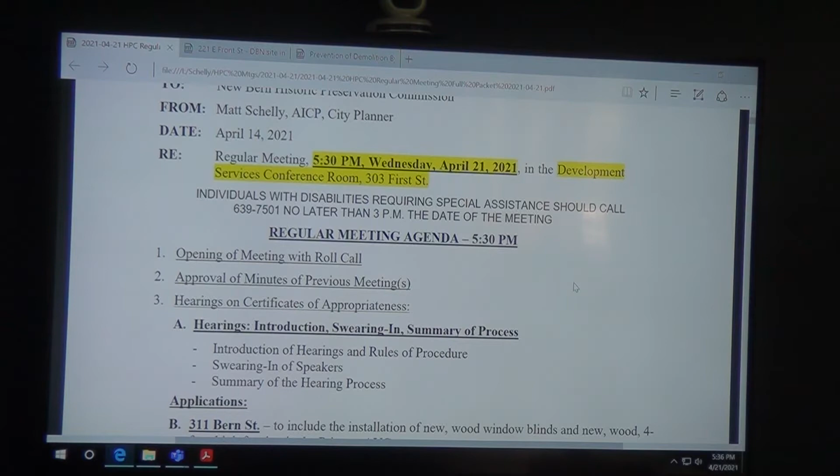Here's how we're going to proceed. The HPC administrator provides an overview of the application. The applicant or their representative presents the application if they have additional comments. Proponents and opponents who have received notice of the hearing can present evidence. Rebuttal is allowed by the applicant and by proponents and opponents who receive notice. Others who can justify that they have relevant information and will be directly affected can present evidence.

The HPC administrator presents the staff's findings and their recommendations. The applicant or their representative has an opportunity to make final comments on the application if they so desire. Commissioners discuss the evidence and may ask for clarification from the applicant or their representative. The chairman calls for a motion to approve or deny the application with stated findings of fact. The motion is discussed by commissioners. The chairman calls for a vote on the motion by the commission. The COA can be approved, it can be approved with conditions, or it can be denied.

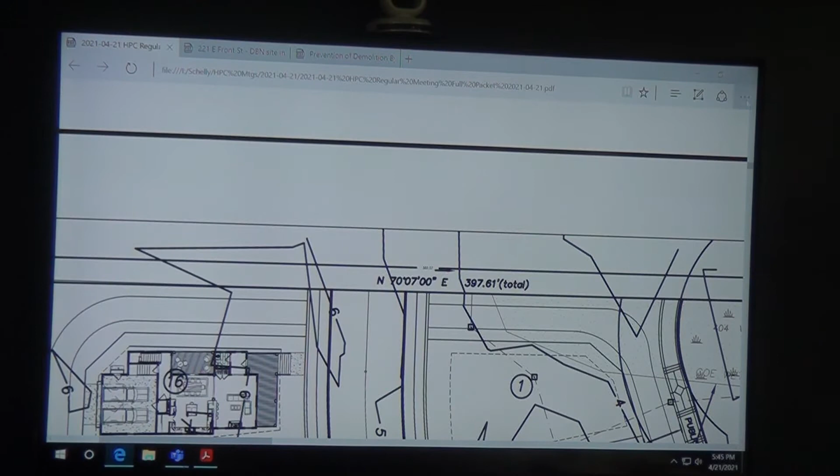I apologize, I used the same front on it and did not change it. All right, so you need to correct this page. Yes, I do. So we need to remember that whoever makes the motion, don't forget about correcting the first page. Bruce, let me be clear, we're saying the property has two owners?

No. So, that's one of them. The owner is Scott Davidson, and he has signed the authorization form. I used the original River Station front page that I've been using for all the houses that I've been bringing to you, which is Hubie Tolson and the River Station Development Corporation. So they are working in tandem, and they have a contractual relationship to build a house for him.

This is the front sheet of the drawings. You see the site plan on the left. We're talking about this one at the bottom, 802, on the corner of Queen Street and East Front Street. This lot also faces onto, or backs onto, the river, which is off screen on the right. So the front of the house faces East Front Street. This is a rendering of that.

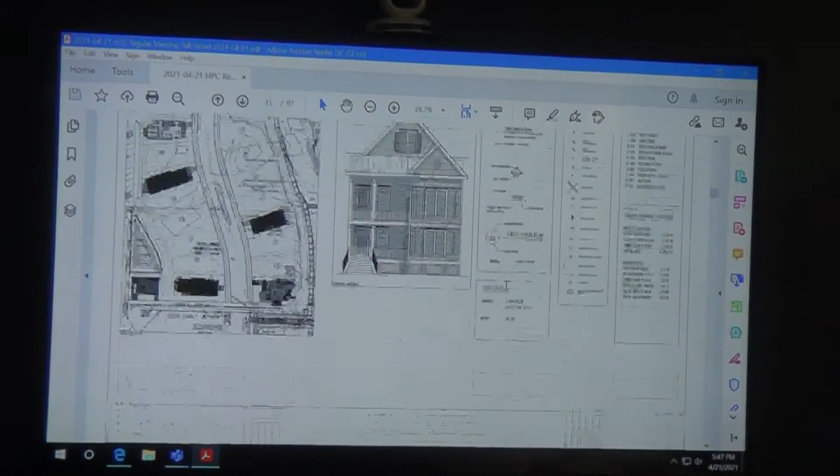Why is that blank? Why are those all blank? There's 97 pages, and something tells me there aren't actually 97 pages. Oh, there are—he puts it all in one PDF. Let's try this one. There we go, so the program couldn't handle it.

Here we have an enlarged view of the site plan. Again, you can see the front of the house facing East Front Street with the steps and walkway to the porch. On the side is the driveway for the garage, which is on the side of the house. On the back there's a small porch with steps and a walkway out to the access road or alley. You can also see the back has a bay window shape for this room, and lastly on the north side, a small trash enclosure. The property line is the dashed line on that side, and the small dashed line represents the building envelope, the limits of where they're allowed to build.

All right, next—we can always come back to anything if there are questions. Now an enlarged view of the first floor plan, with the same features again: the front porch, the garage, the back porch, the bay window, and the trash enclosure.

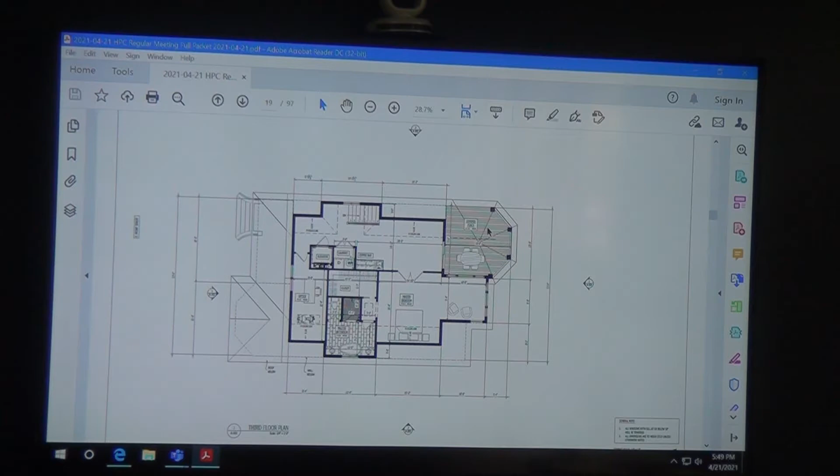Here again we see the front view, with the front steps and front porch we saw, plus the second floor porch. There's a gable, and a second gable for the third floor. This sloping roof is a metal roof, and all the other roofs not shown with this striping are asphalt shingles—fiberglass asphalt shingles.

Now we see the side elevation with the garage door and the small pent roof, which has metal roofing over the opening. You can see the various windows, and at the top, the gabled dormer.

On the right side is the railing for the small back porch, with the stairs poking out just past the end of the porch wall. On the first floor is the bay window configuration I mentioned, with its side window. Above that is the second floor porch, and above that the third floor porch projecting out from the back face of the wall.

Here is the rear elevation. The small back porch is on the left with the steps. On the right is the bay window configuration, the second floor porch, and the third floor porch, topped by a gazebo-like roof covered with metal roofing, along with quite a number of extensive windows in the back.

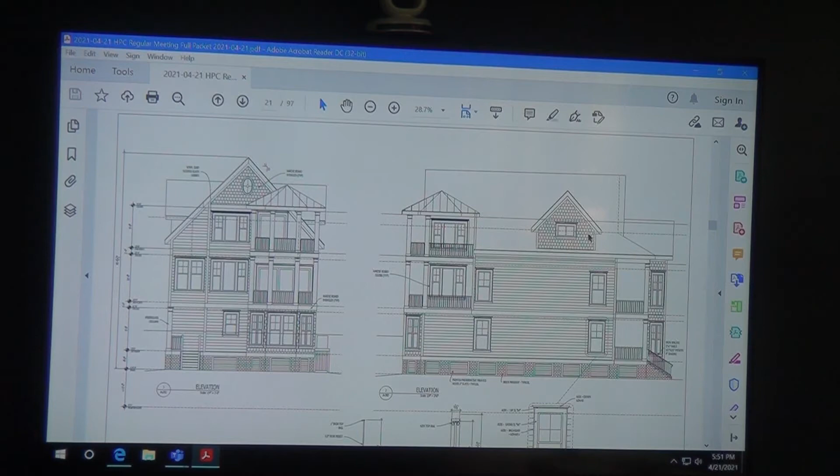This side now has the same features again—back porches on the back and, on the right, the front porches. This side also has a third floor gable dormer. We have some details about the railing and some window detailing, the iron railing.

Here we have some renderings showing the house, from the front on the left, and also the front from a different angle, so you can see the two porches on the front—the double stacked porches, I guess.

Then also a rendering from the back, and I think we can enlarge that to have a better idea. Okay, so you have your porch, your garage door, and then the two upper porches here.

Does this seem squashed a little bit horizontally, this image, or do you think it's accurate? The gazebo, there are a few issues with the rendering that we have since fixed. I think that the architectural drawings are more accurate. Yeah, this seems steeper, this slope here. The gazebo roof is not quite as, it's a little flatter than what's on the other drawings. But it's all in perspective too, so, okay. I think they did, yeah.

So, let's see, so then we have, that's the end of the application. We have our zoning and inspection review form, where they've stated that it meets the zoning, the land use ordinance, and the chief building inspector says, of course, we'll need a building permit. And then we're ready with our recommendations when you're ready.

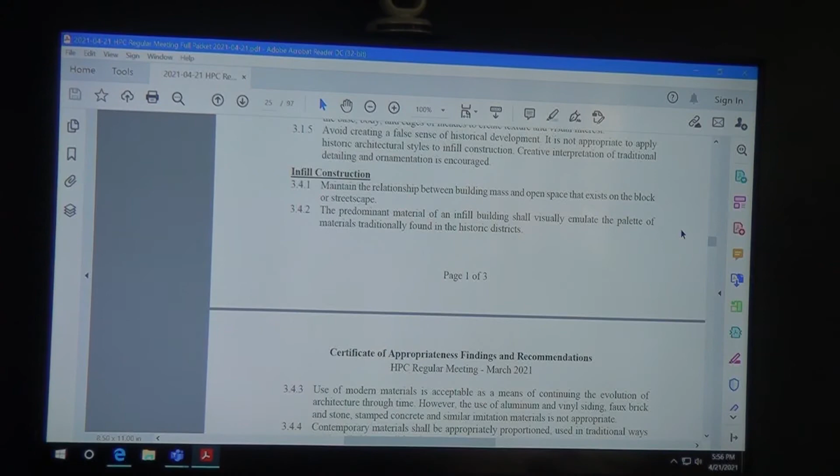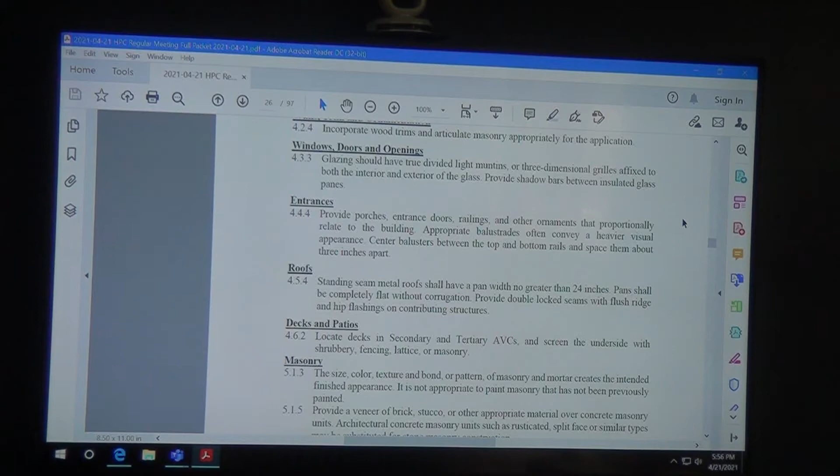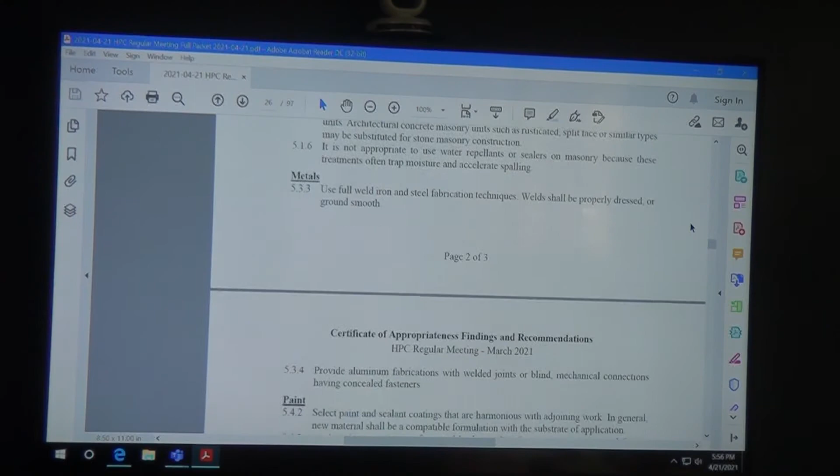Staff submits the following historic district guidelines are appropriate to this application. For development pattern, 2.1.1, 2.1.2, and 2.1.3. For design principles, 3.1.1 through 3.1.5. For infill construction, 3.4.1 through 3.4.4. For foundations, 4.1.3 and 4.1.4. For walls, trim, and ornamentation, 4.2.4. Windows, doors, and openings, 4.3.3. For entrances, 4.4.4. For roofs, 4.5.4. For decks and patios, 4.6.2. For masonry, 5.1.3, 5, and 6. For metals, 5.3.3 and 5.3.4. For paint, 5.4.2, 3, 4, and 6.

And the statements of reason based on the information contained in the application and staff's judgment are: the project is located within the primary, secondary, and tertiary AVCs. The project is located within the narrow stitch development pattern. The zoning administrator and the chief building official have reviewed this project and commented accordingly. And the project is not incongruous with the guidelines. So staff recommends the commission approve this application for construction of a new 2.5-story infill house.

Thank you. Can you ask if there's any evidence or testimony from any city, state, or government entity for this project? No, there are none. Hearing none. Do you have any final comments, ma'am, you'd like to make? She's shaking her head no.

So we will now have a discussion by the commission members. What questions do you have? What comments do you have about this new house?

My first concern is the houses are going up rather rapidly, and we have yet to receive any type of landscape plan. These houses are all sitting out in an empty field. There's not a tree, maybe some scraggly trees along East Front Street, maybe 4 or 5. And we have yet to have any type of landscape plan. I think we need to have some idea—are there going to be any trees planted out there, Sarah?

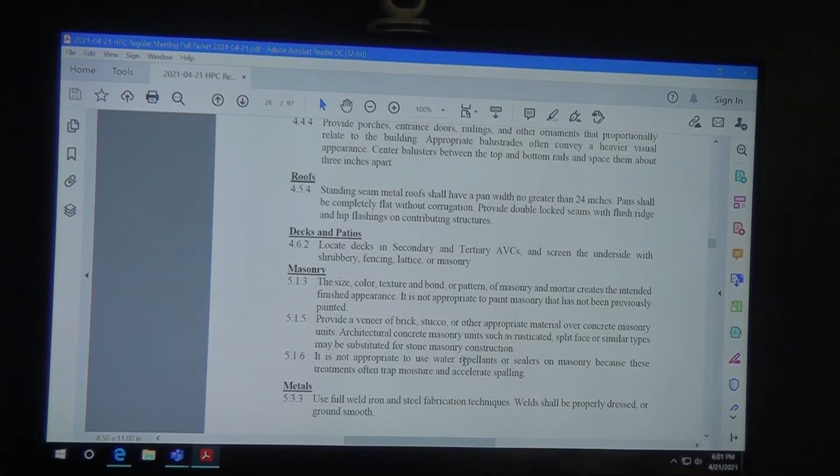Foundation 4.1.3 and 4. Walls 4.2.4. Windows, doors and openings 4.3.3. Entrances 4.4.4. Roofs 4.5.4. Decks and patios 4.6.2. Masonry 5.1.3, 5 and 6. Metals 5.3.3 and 5.3.4. Paint 5.4.2, 3, 4, and 6.

Statement of reasons: the project is located within the primary, secondary, and tertiary AVCs. The project is located within the narrow stitch development pattern. The zoning administrator and chief building official have reviewed the project and commented accordingly, and the project is not incongruous with the guidelines. As a condition, on page 1 of the application, it should reflect the ownership of the property by Mr. Davidson.

If I may, you mentioned statements of reason, I think you meant findings of fact. Yes, I'm sorry, yes. So do we have a second? Second. Okay, all right, all those in favor say aye. Aye. Opposed? Hearing none, the motion passed.

Can we have, okay, the second, George. Yes. Can we have a motion for issuing a COA? So moved. Do we have a second? Second, George is the second again. All of those in favor say aye. Aye. Opposed? Hearing none, the motion passes and you can have your COA. Thank you very much. Thank you for bringing us the plans.

Well, okay, you want me to go out? The next one is 211... 211 Johnson Street, 211 Johnson Street?

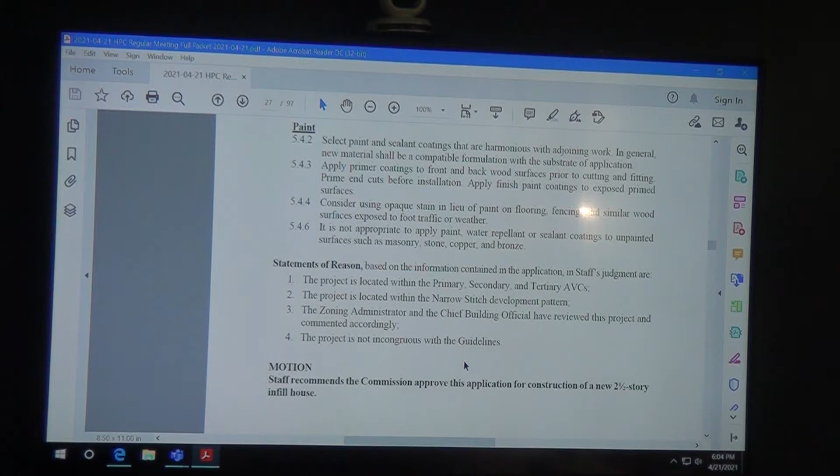Okay, so this is the application for 611 East Front Street, the Jerkins Havens House, built in 1885. The property is of Paul Deering and Nicole Kerr, and the applicant is Go Architectural Design, PLLC, Sarah Afflerbach, AIA. And you can see complete application, signed and dated by the authorized representative, who is authorized here, Go Architectural Design, PLLC.

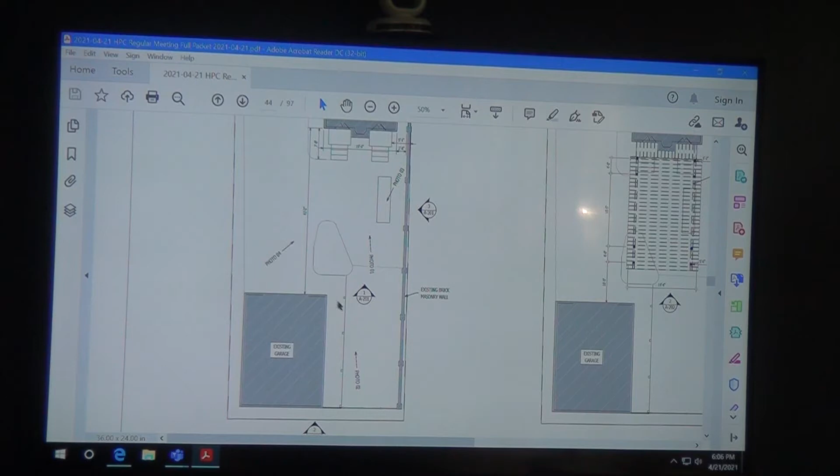And in this case, by the actual owner, same as the name on the application. All right, so this will be our first page of the drawings, and this shows two versions of the site. The first on the left is the existing plan, and on the right is the proposed plan. So let's go over here to the existing plan. You can see the house here with the street out front, so we're looking in the backyard here. There's a driveway up the left-hand side, and this is mostly all paved with bricks. And then there's a garage in the back corner of the lot, and you'll see there's 4 posts here, with an overhang from the porch roof over that area.

So on the right-hand side, we see then the proposal, which is to add a roofed pergola over this section of the backyard, extending from the house out to within, what is that, 10'5" of the garage. Let's see.

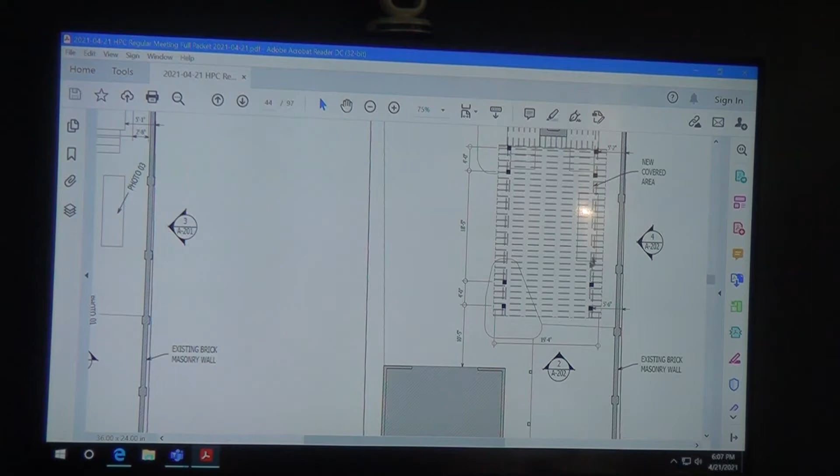It's 10'5" from the garage, and also located 5'2" from the property line at that end and 5'6" from the property line at this end. You can see there are 4 posts at this end and 4 posts at that end.

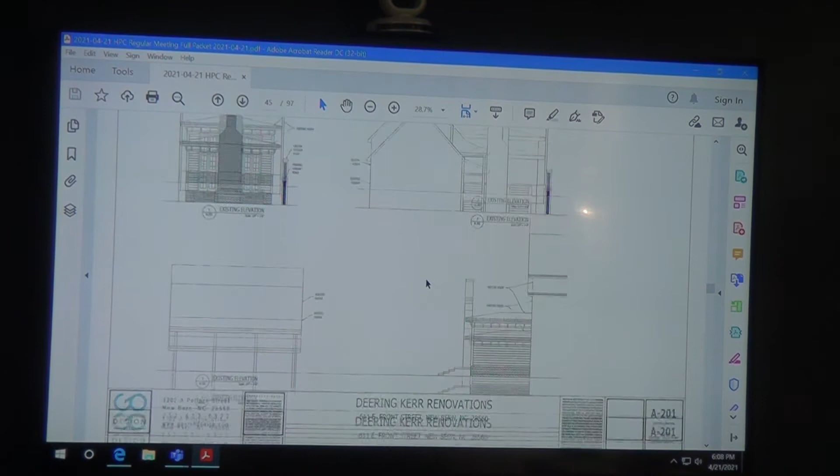All right, so now we go back to some drawings. Here we see on the left is the existing elevation of the back of the house, and then with the same elevation with the garage included, essentially in silhouette here, but it's the back of the garage, so as if you're standing at the rear property line.

This is a side elevation which includes the house on the right, the small one-story addition that's here on the house already, and the existing chimney, and then the existing steps. The space all the way out to the garage, and then this is that covered portion of the garage here. So this is one drawing showing the space in between the two.

Now this is a drawing which then fills that space down here with the proposed cover, extending out from the existing building towards the garage, but not quite touching the garage, 10 feet away.

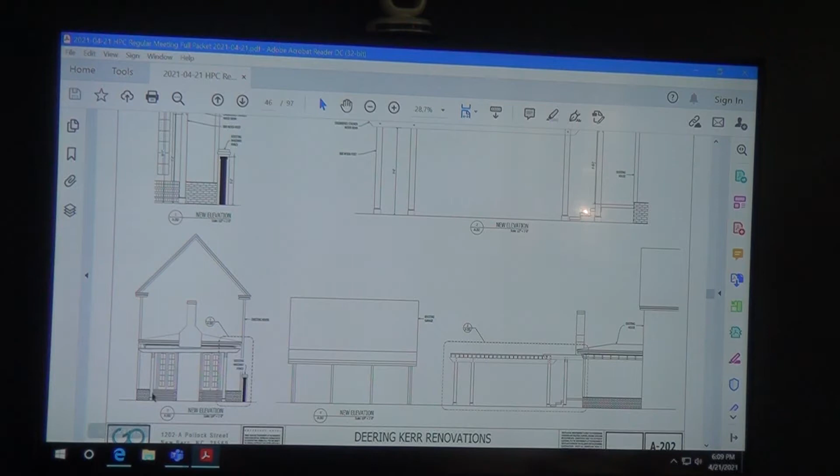And then we have that rear elevation here on the left with the new cover shown here in front of the house. Up here are some expanded or enlarged drawings showing more of the construction and some of the issues about head clearances and placement of the posts, different kinds of materials, and then more or less a section view looking back towards the house showing only the right-hand side of the covered area, the posts in a line here, and then the overhang and all the materials and such there as well.

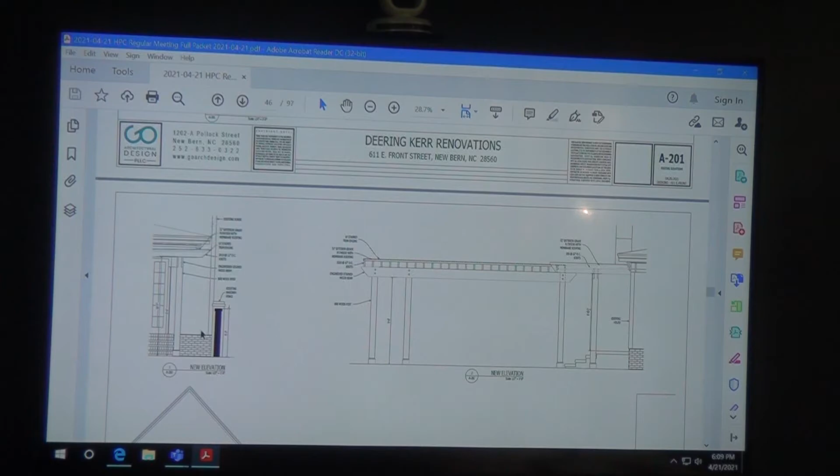And then we're ready with our recommendations. Are there any members who have conflict of interest with this project? Are there any members who have an issue with the applicant's completeness? Does the applicant want to say anything else about the project?

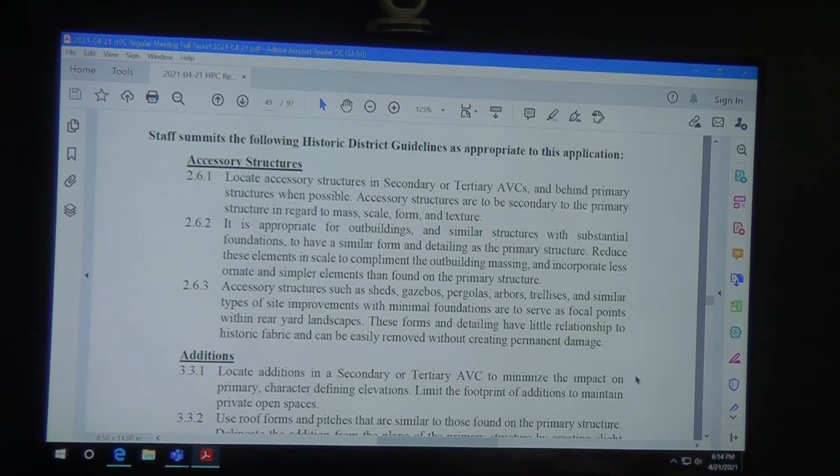Staff submits the following historic district guidelines as appropriate to this application: for accessory structures, 2.6.1, 2.6.2, 2.6.3; additions, 3.3.1, 2, and 3; walls, trim, and ornamentation, 4.2.1; roofs, 4.5.1, 2, 3, and 4; for wood, 5.2.1 and 2; for paint, 5.4.2, 3, and 4; for contemporary materials, 5.5.6.

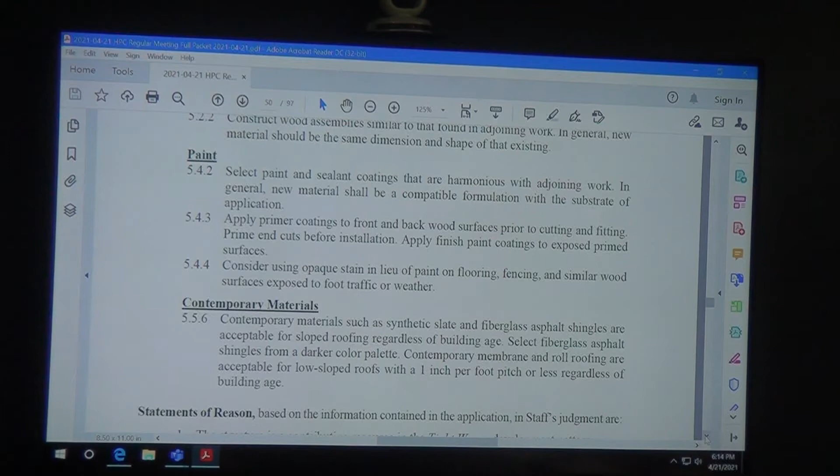Statements of reason based on the information contained in the application and staff's judgment are: the structure is a contributing resource in the tight weave development pattern; the project is within the tertiary AVC; the proposed design components and materials meet the requirements of the guidelines; the zoning administrator and the chief building official have reviewed this project and commented accordingly; and the project is not incongruous with the guidelines.

Since they've changed the design, we no longer have the following conditions. Staff recommends the commission approve this application to include a new roofed wood trellis in the tertiary AVC.

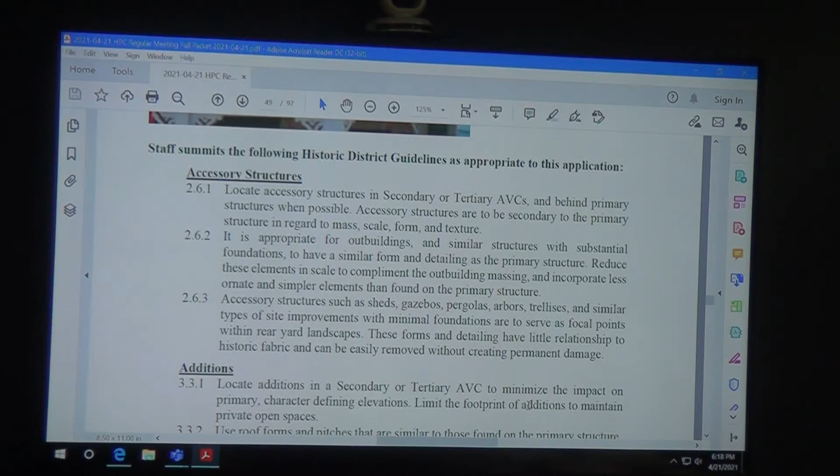It's enough for a membrane, and we're trying to keep it dry, but technically there's nothing under it, it's just outdoor space. We're trying to hide that membrane with a wood edge around it, so what you see from the outside is only wood—you wouldn't, standing in that driveway or in the neighbor's yard, be able to see any membrane.

Okay, any other discussion questions? Could we have a motion related to this project?

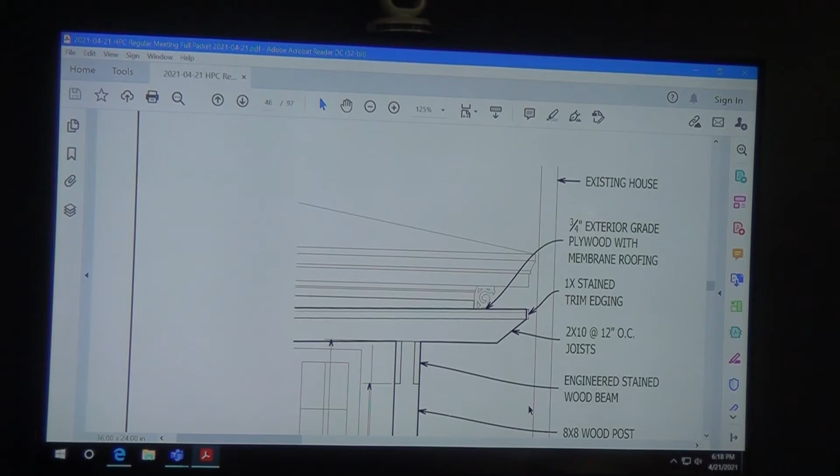Madam Chair, I move that we find the application for certificate of appropriateness for 611 East Front Street to be not incongruous with code of ordinance sections 15-411 to 15-429, and New Bern historic district guidelines based on specific guidelines and findings of fact. Applicable guidelines: accessory structures, 2.6.1, 2.6.2, 2.6.3. Isn't it an addition? Didn't we go through that? It's not technically an accessory structure? That was the whole point of the zoning?

Right, okay, so that's true. I listed both accessory structure and additions depending on how it was attached or not attached to the structure. So is the building actually attached? Yes. So it's an addition, because if it were an accessory structure we'd have to keep it 8 feet away from the house. That's correct. So being attached, it's just an addition, so you can strike the section on accessory structures.

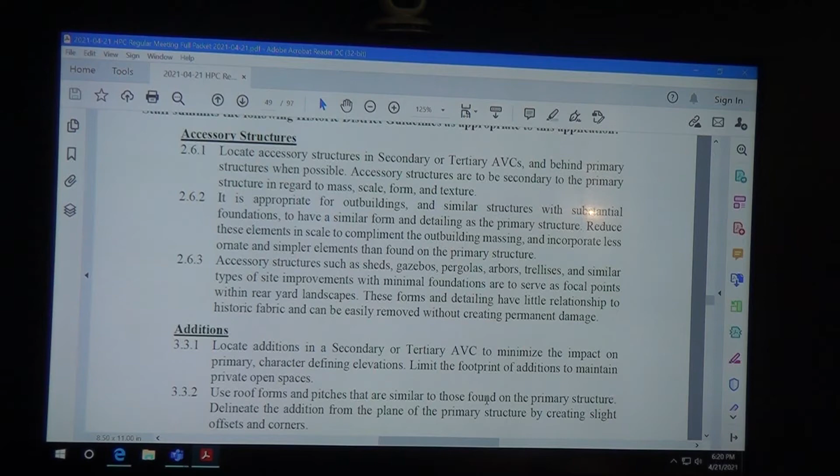Okay, we withdraw the motion, start over. Sorry.

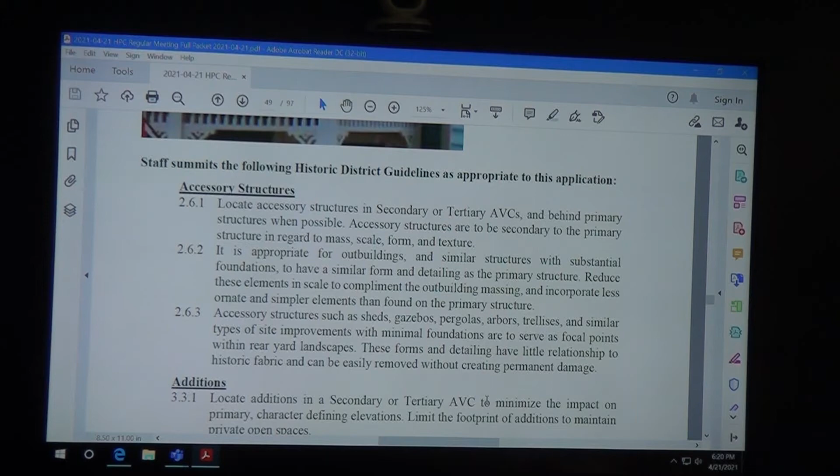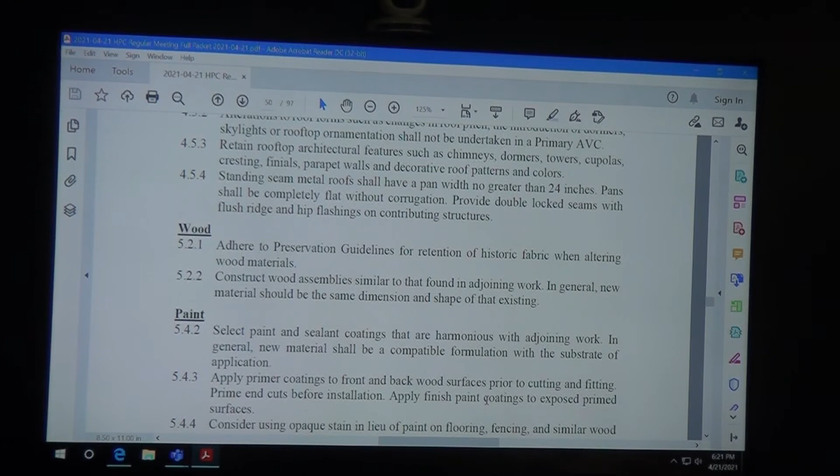Move that we find the application for certificate of appropriateness for 611 East Front Street to be not incongruous with code of ordinance sections 15-411 to 15-429, and New Bern historic district guidelines based on specific guidelines and findings of fact. Applicable guidelines: additions 3.3.1, 3.3.2, and 3.3.3. Walls, trim, and ornamentation, 4.2.1. Roofs, 4.5.1 through 4.5.4. Wood, 5.2.1 and 5.2.2. Paint, 5.4.2, 5.4.3, and 5.4.4. Contemporary materials, 5.5.6. Findings of fact: the structure is a contributing resource in the tight weave development pattern.

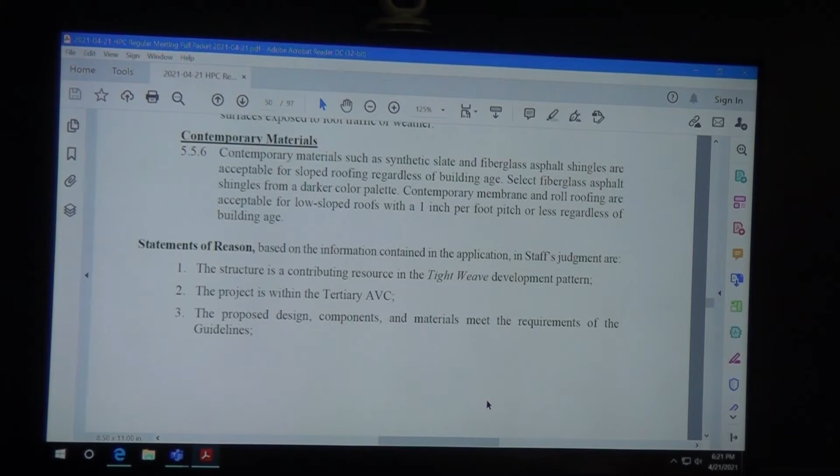The project is within Tertiary AVC. The proposed design, components, and materials meet the requirements of the guidelines. The zoning administrator and the chief building official have reviewed this project and commented accordingly.

The project is not incongruous with the guidelines. Thank you. Do we have a second on this motion? Second. Any questions at this point? Hearing or seeing none, all in favor say aye. Aye. All opposed, nay. We hear no nays, so the motion passed.

Can I have a motion to issue a COA? So moved. Do we have a second? Second. George is the second. All in favor say aye. Aye. All opposed, hearing none, the motion passed.

Thank you very much. Thank you. Mahalo. You're welcome. Enjoy it. We'll have a party when you get it done. Bet. Yeah, gotta get the luau. So you said.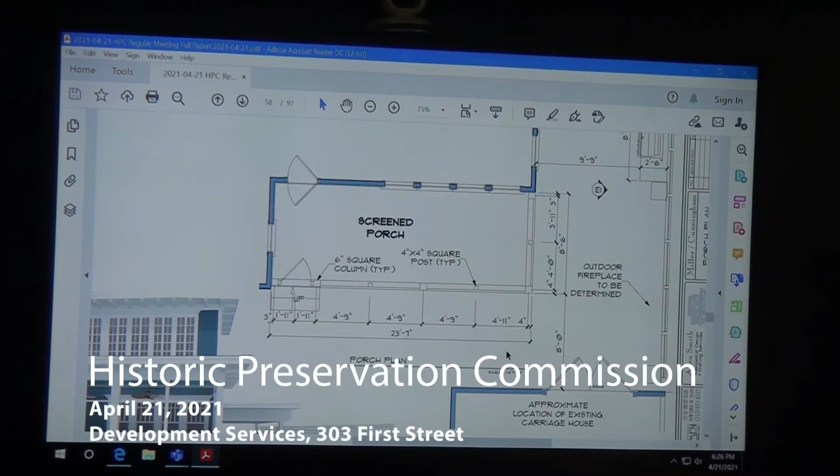This project has the same kind of situation as the last one, in that this is a revised drawing since our recommendations were written and the zoning and inspections report was done. We'll get to that in a minute, but this is just to let you know that we're okay.

This drawing also shows on this end the area before, or behind the carport, where they're going to be adding a bit of outdoor kitchen for a gas grill and a sink. The previous plan had a fireplace here, and in this drawing it's been removed, with the outdoor fireplace to be determined.

This gives you a rendering view of the proposal. The new porch with the steps and the foundation with the brickwork, and on the right-hand side the new outdoor kitchen. Here you can see the carport beyond.

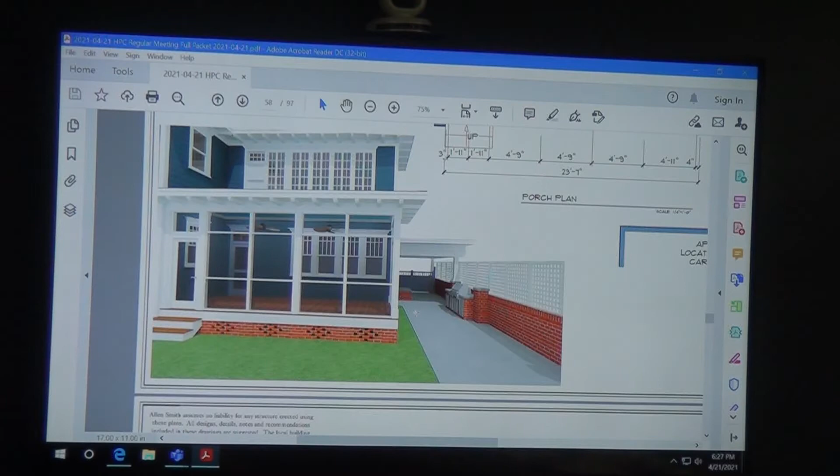To note, there's also a projection out into the carport here, so it may or may not be possible to use this paved area for vehicles, which could become a question later.

Now we have architectural elevations of the project, very similar to the rendering we just saw: 2 and 12 pitch metal roofing, 4x4 square posts, and 6-inch square columns on the corner and in the middle, next to the door.

Let's see, there must be more on this side. Oh, the outdoor cooking station elevation—you can see that there. This brick fence, or the brick wall and the fence on top, is already pre-existing.

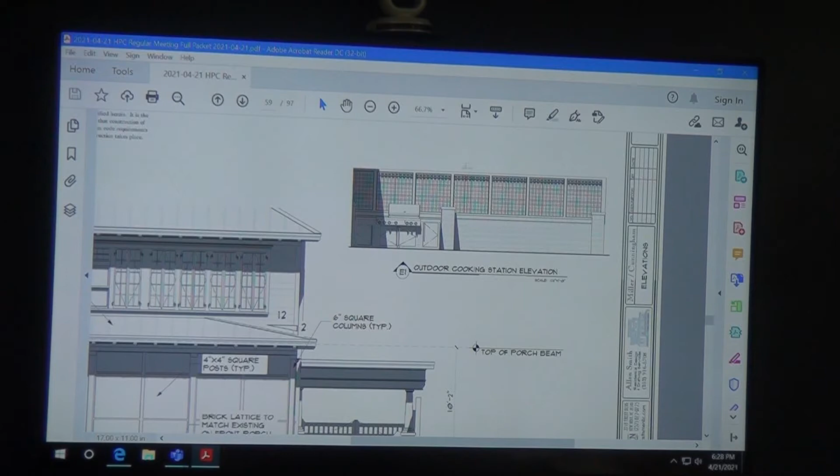Here's another—go to the plan first. This is just the foundation plan to show the layout. And now the elevation from the side of the porch is very similar to the back of the porch.

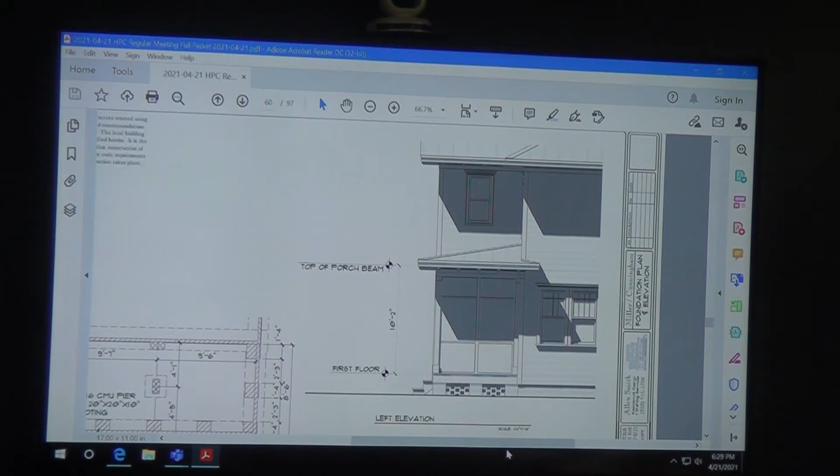I did include the old drawings in case there's some discussion about the fireplace, so if we need to, we can come back to that.

This is their detailed list of the work to be done and the materials to be used. And then this is our zoning and inspection review.

The zoning administrator noted the addition must leave at least 8 feet separation from the accessory structure, which they have subsequently revised to ensure. The project will require a building permit, and then we're ready with the recommendations when you're ready.

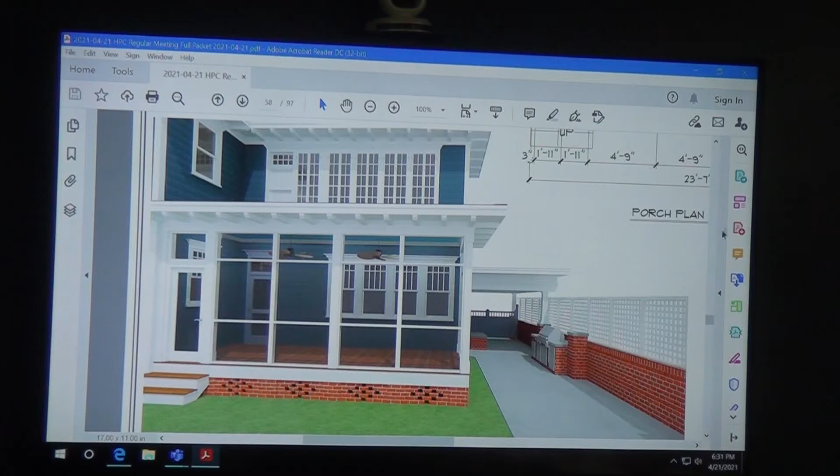So this is the findings for Seth and Samantha Cunningham's project with Coastal Craftsmen Incorporated for 617 East Front Street, to include removing the existing stoop and roof, existing concrete patio, and portion of the brick driveway, and to construct a new screen porch, brick outdoor kitchen with or without a fireplace, brick patio paving, and a wood outdoor shower enclosure, all in the secondary and tertiary AVCs.

For the National Register inventory of 2003, this is the Abbott Row House, built around 1885 with renovation in 1923. A contributing structure, described as 2.5 stories, 3 bays wide, with pediment and hipped dormers and a hipped main roof. The relevant description portion from 1988 notes it outwardly bears the 1920s detailing of the colonial revival and bungalow styles from the 1920s remodeling.

The dominant exterior detail is the broad overhanging cornice, a feature that is repeated on the front porch and side porte cochere—all of these brackets coming out underneath at the eaves.

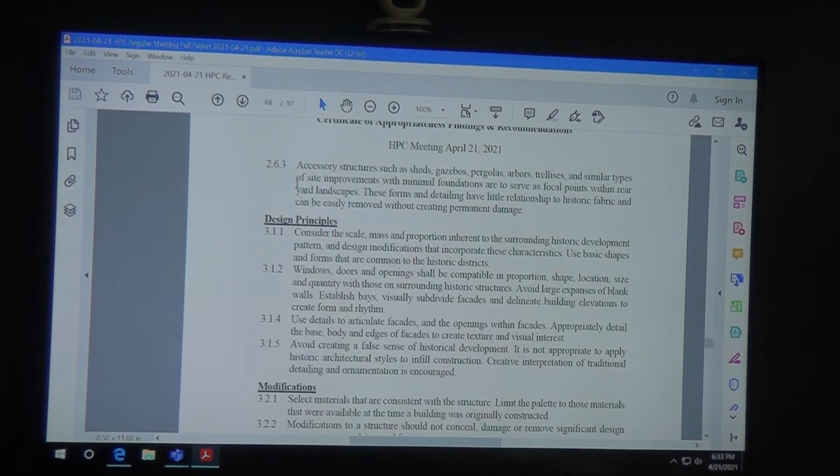Let's continue with this: 2.6.1 and 2.6.3, design principles 3.1.1, 2, 4, and 5, modifications 3.2.1 and 2, additions 3.3.1, 2, and 3, foundations 4.1.1, 2, 3, and 4, walls, trim, and ornamentation 4.2.1 and 4.2.4, windows, doors, and openings 4.3.1 and 2.

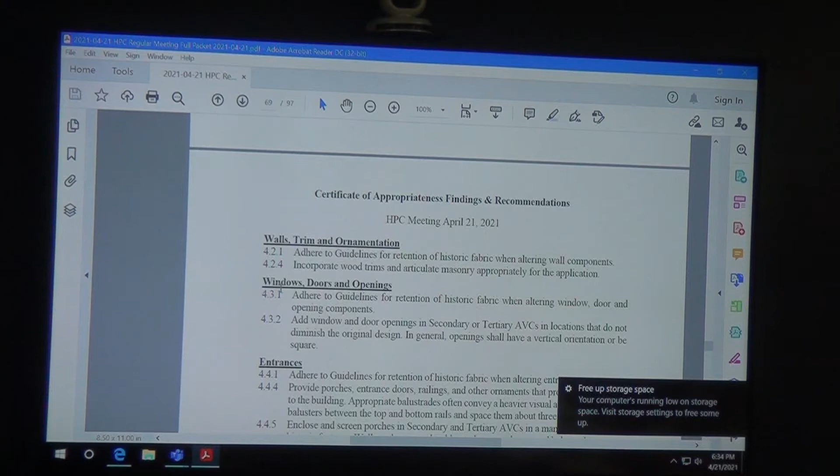For entrances, 4.4.1, 4, and 5. For roofs, 4.5.4. For masonry, 5.1.1, 2, and 3. For wood, 5.2.1 and 2. For metals, 5.3.2. For paint, 5.4.2, 3, and 4.

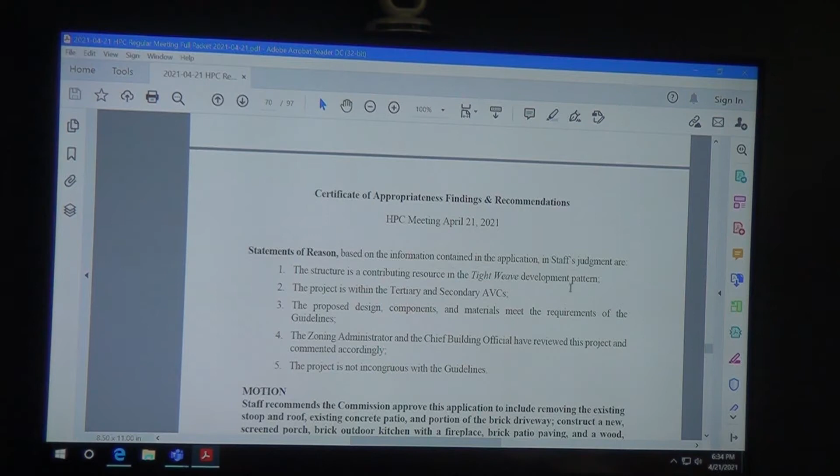Statements of reason based on the information contained in the application and staff's judgment are: one, the structure is a contributing resource in the Tight Weave development pattern. Two, the project is within the tertiary and secondary AVCs. Three, the proposed design, components, and materials meet the requirements of the guidelines. Four, the zoning administrator and chief building official have reviewed this project and commented accordingly. And five, the project is not incongruous with the guidelines.

So again, we will strike the condition because they changed the dimension of the project. Staff recommends the commission approve this application to include removing the existing stoop and roof, existing concrete patio, and a portion of the brick driveway; constructing a new screen porch, brick outdoor kitchen with or without a fireplace, brick patio paving, and a wood outdoor shower enclosure, all in the secondary and tertiary AVCs, without any conditions.

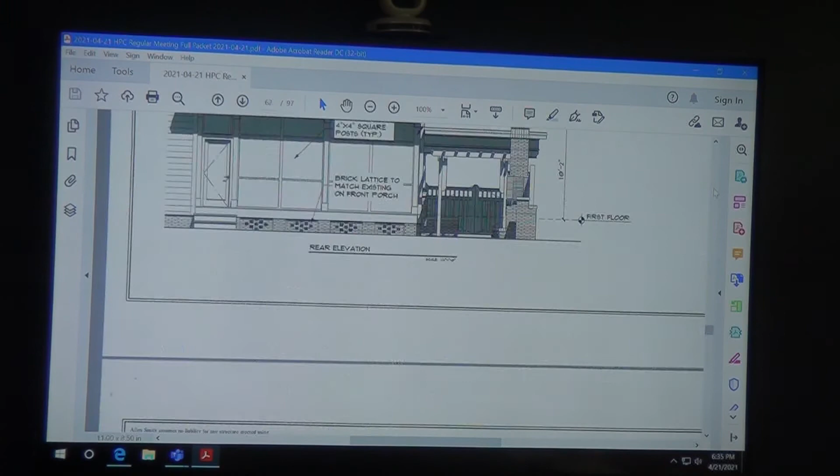May I ask, where is the outdoor shower enclosure? Did you show us where that was? It's not on the rendering, but it'll be just on the outside of that outdoor kitchen. Is it in the plan? It's not on the rendering. Just on the left side, if you go down a hair, just on the left side of that grill area. There's a column there, it would be just on the left side of that column.

I thought I saw something right here, is that it? Or is that the column? That's the column. So there's an outdoor shower going right here? That's correct. And do you have some description of that? It'd just be a standard pressure treated 3x3 outdoor shower, hot and cold.

So what do you mean, like pressure treated walls? Okay. Yeah, that'll be either opaque stained or painted to match the lattice on the fence. Is it enclosed? Yeah. And you were saying 3x3, what's that? 3x3 dimensions, 3 foot by 3 foot. Gotcha, like a lanai.

I'm not familiar with what that is. In Hawaii, they have a lot of outdoor showers. Okay, and would you show the placement again, please? Just north of that column there, where there's a prep sink. You've got your carport column, and it'll be just on the top side of that, right here. If you scroll down, Matt, it's a little easier to see.

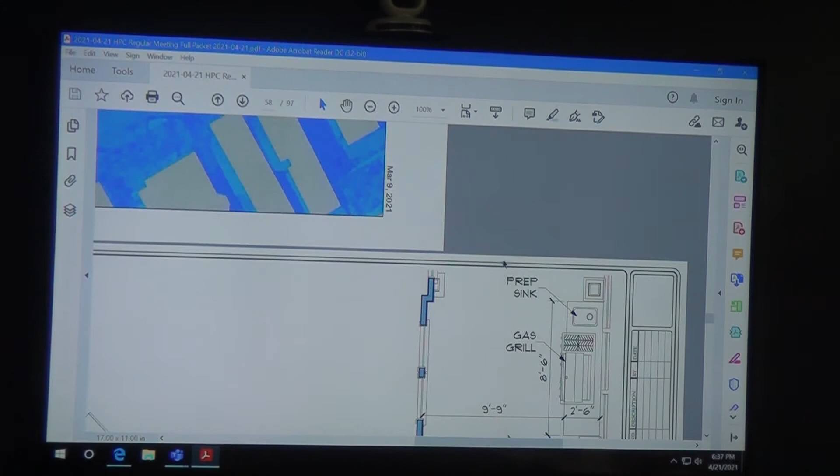So it's on the west side of the property. East side. Well, it's in the back, on the south side of the property, to the east of this column, because north is to the left. So you'll need to redo that and show that in your drawings. And we can make a condition that Matt approve that design, perhaps? Right, yes, we could do that.

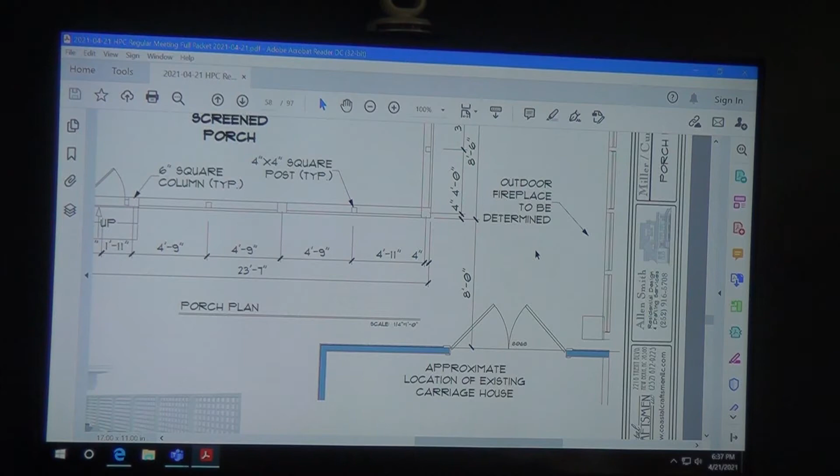Now, the river is on the east side, correct, so the shower is going to be where? On the east side of that column. So let's go back to the rendering, if you scroll left just a hair. So you've got a grill, a column, a shower. Right on the other side of that column, see this column here? Yeah, it'll be just on the other side of that column.

So how deep is the kitchen, it'll be here? 24 inches. So it will stick out another foot from the kitchen, correct, and then 3 feet down and 3 feet back into the brick wall. And it will be pressure treated, painted, or opaque stained wood, somewhat like a privacy fence.

And will be matched in color or stain. This fence up here - what do you call this, the trellis? Lattice, in color, right? The lattice, right?

Before you leave that, Matt, just for information - the lattice work above the brick wall is pre-existing, so there's no problem with it. But what happens if it breaks down, since it's probably made of wood? Can they replace it without permission? If they replace it exactly as it was, that's a replacement in kind. If they repair it, that's a repair. Both of those don't require a permit or a COA, but they still have to check with us to make sure it meets those criteria.

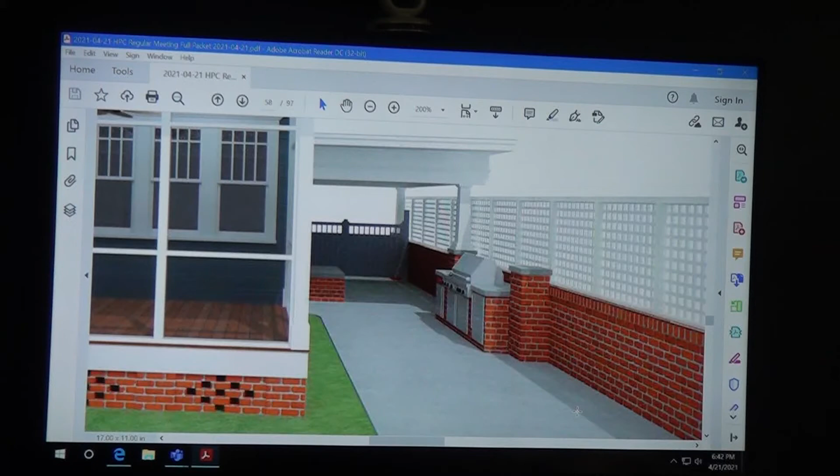And how tall would this kitchen with a fireplace be? Well, let's first make sure the applicants understand the options. The reason it's not on this most recent rendering is that the number one focus was to change our dimensions so we can have proper spacing for zoning. This same design of the fireplace will stay - it's going to get a little bit smaller actually, so it'll fit the space better.

So the fireplace is still part of the design, it'll just be a smaller rendering of that design. And how tall will it be? The top of the fireplace will be 2 feet above any structure within a 10 foot distance from it, so that's to be determined on site.

So at that point, the two options are either you submit that as a separate project in the future and go through this one more time, or you submit it as it is shown here and do minor revisions to it later. Yeah, I think that's what we'll do - unless there's any objection to including the fireplace, which would inhibit this from being approved. Right, so that would be the last thing, but yeah.

Okay, so now we can go and look at the actual fireplace design they have here, right? No, Mr. Ure, I'd like to include it if we can. So this is the rendering and the plan view right here? See, it's taller than the fence. Yes, a fireplace has to be 2 feet higher than anything within 10 feet around it.

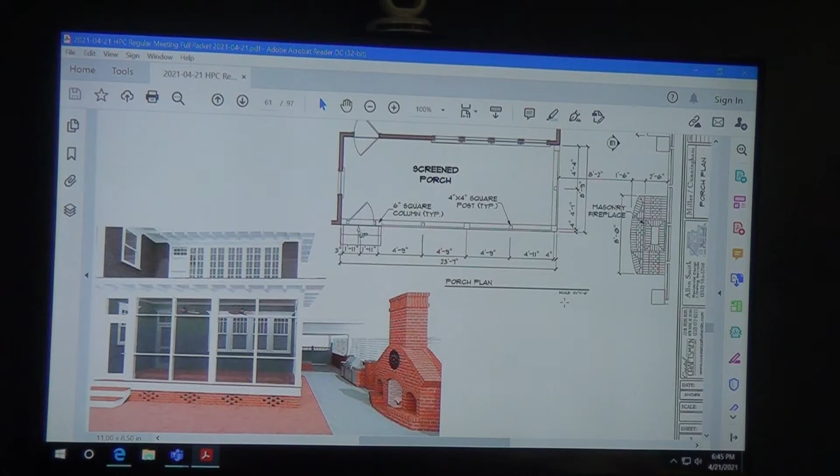The question becomes one of, there's a lot of construction going on basically on the property line. I agree. And what happened to the setbacks that are required from the property line for construction? So that's a zoning decision, not an HPC decision. Well, but we can't approve a design unless zoning has addressed that question. And if they've addressed the question, then we can talk about the design. If they haven't, maybe that's another good reason to have it be a separate application.

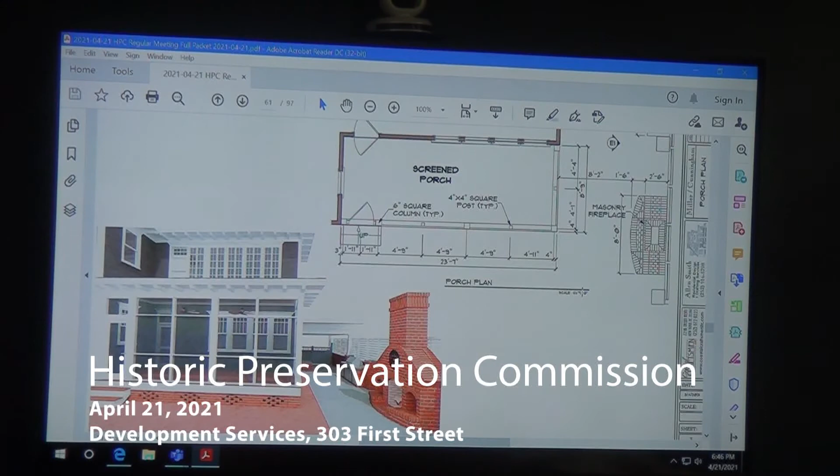Oh, but that includes the kitchen, not just the fireplace. Because the kitchen has a brick base, so it's attached. Lot coverage and setbacks pertain to the structure, enclosed structures, but it doesn't preclude you from building other things within the setbacks, like driveways or fences. The porte cochere, I mean, you know. Yeah, well, the porte cochere is 100 years old. I understand that, and I'm not questioning that. So I'm not sure there's a conflict with the application we see, at least in my opinion.

But I do see what your point is. Thinking about it, I think there are a lot of things that, because of the lot sizes we see in the district, get built in the setbacks that take up a lot of space. But the setbacks are meant to address buildings and accessory buildings. Well, which are buildings—primary and accessory buildings. And there's different setbacks for each.

I don't see them moving further into the backyard because there isn't one. Right, I mean, you know. But you're gonna have so much structure right here on the side of the porte cochere. It's in the setback, but if my memory serves, it's also further back than where any cars ever are. So it's essentially what functions as their yard.

And the fact that they're adding a shower, which will be 1 to 3 feet narrower than it currently is, makes it even less likely that a vehicle would go through there. So no part of this design is focused on vehicles past that gate. And one would assume on the other side of the fence, the neighbors, also lacking a large backyard, do more or less the same thing.

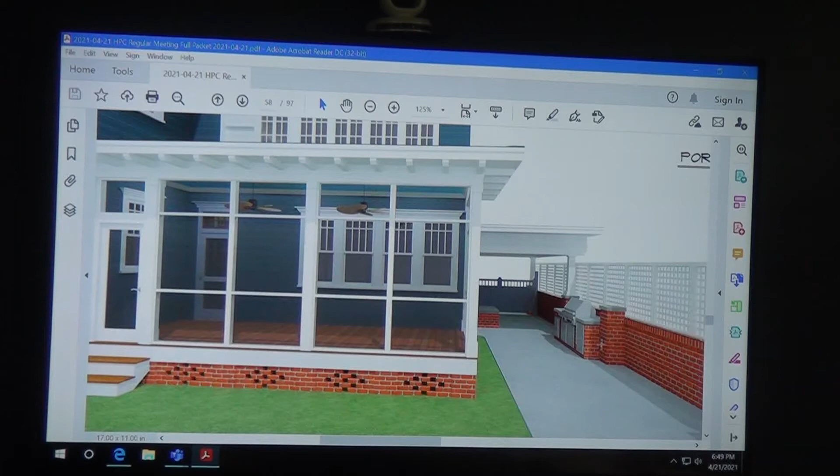So at the moment, they're proposing this without the fireplace and the wood-enclosed shower. That we don't see. That you don't see. But someone had suggested we make that a condition.

So we're doing the screen porch and the grill, basically. Essentially. And the shower. The shower as a condition with Matt's eyes on it. Right, right. And we're not doing anything about the big—that's correct, we're not doing anything about that.

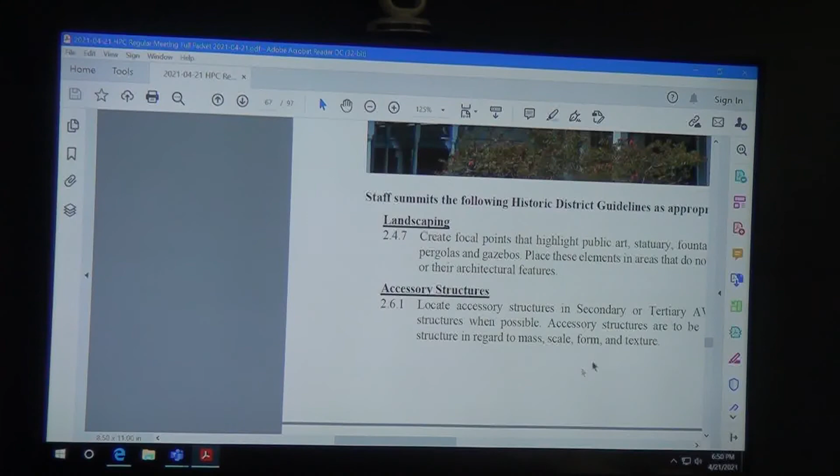All right, so that's the discussion, right? We got through my entire recommendation, that's correct? We have. And so now we're in the middle of discussion—one of the additions, whoever makes the recommendation, is that they bring a rendering of the shower and that driveway area with the shower added in there. And no big fireplace, bringing it to you. So are we scratching the fireplace and addressing that as a separate COA? Yeah, yes.

And aside from calling it a shower, would that be an accessory structure? Because it's closed? Well, it doesn't have a roof. It's a fence, it doesn't have a roof under roof. It's a three-sided fence, so it's in the carport. I'm just raising a question. No, it's not a structure. I don't think we've had to deal with an outdoor shower yet, so this is a learning experience. Ask all the questions you need.

Yeah, Mr. Joe. Is the notion that the HPC is delegating authority to you to approve or disapprove the rendering of the shower? Yep. So far, we haven't actually heard the motion and the condition. Well, we've heard a description of it. We just need to see a picture of it where it's really gonna be. And if it doesn't meet what they've described, then this application won't be approved and they'll have to come back to us. Does that make sense to you? It does.

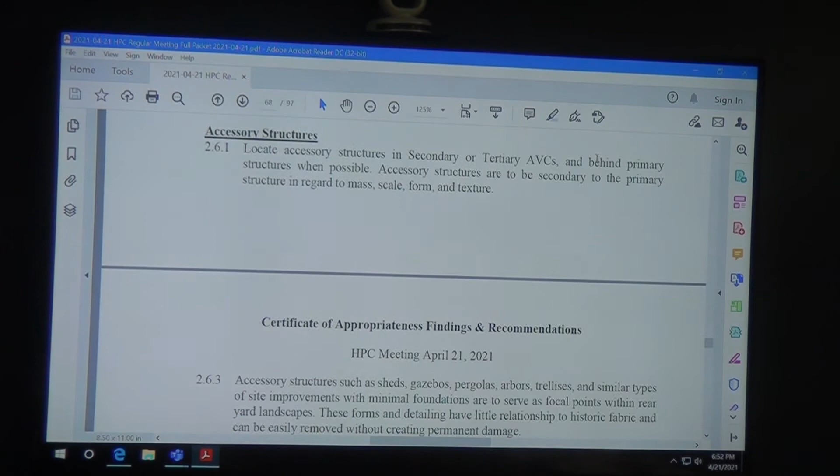I want to talk about the metal roof a little bit. Did we talk about that in design review at all? No, the metal roof? No? Can we elaborate a little bit on it? It'll be a standard standing seam metal roof to match any of the other historic buildings downtown. Okay, Matt, can you go to the detail on the drawing?

So hand seamed, yes sir, in all likelihood flat pans. Yes sir. All right, so I was kind of interpreting that hip as a raised flashing on top of the seams, and just wanted to confirm that we're rolling the seam, I presume. Yes sir. And then rolling that hip. Thank you. No cap. Nope. Excellent, thank you for confirming that.

Does anybody else have anything they want to bring up? So the roof is taken care of in the application, so the only thing we need to add is about the shower at the end. Okay, so can we have a motion? Somebody like to make a motion? Not me. You look so eager. Who's gonna do it? Okay.

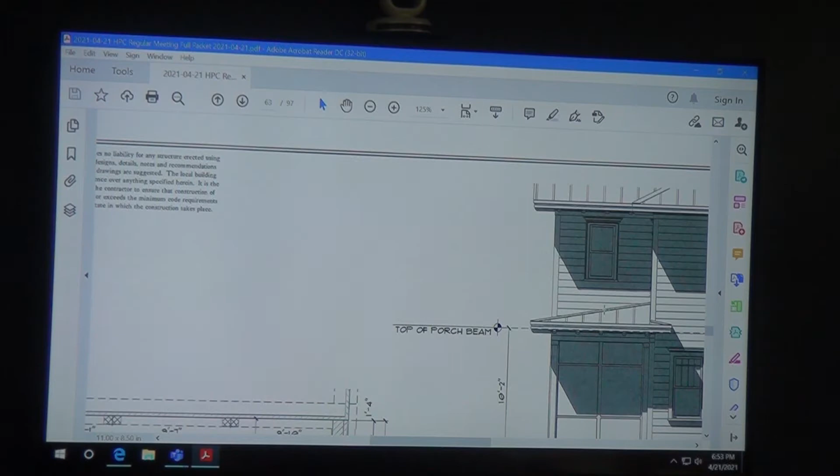I move that we find the application for a certificate of appropriateness for 617 East Front Street to be not incongruous with New Bern's Code of Ordinance, sections 15-411, 15-429, and New Bern's Historic District guidelines, based on the following specific guidelines and findings of fact.

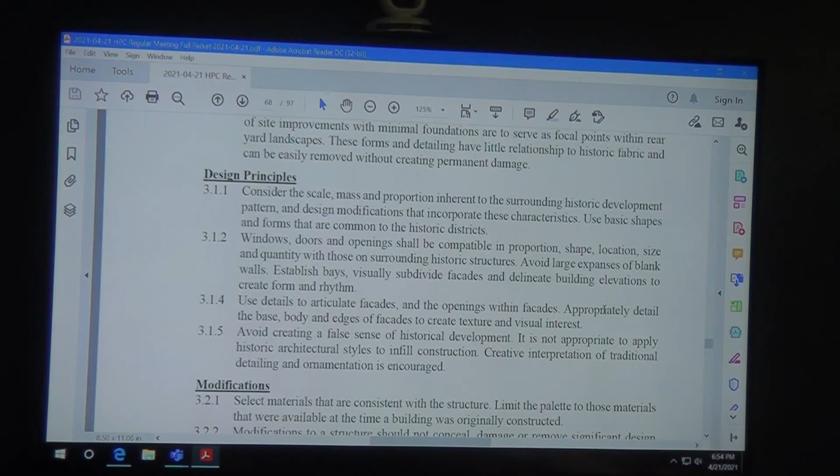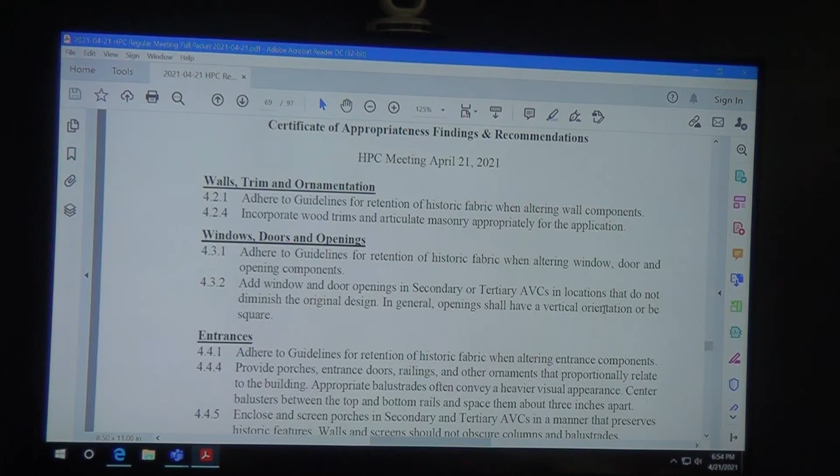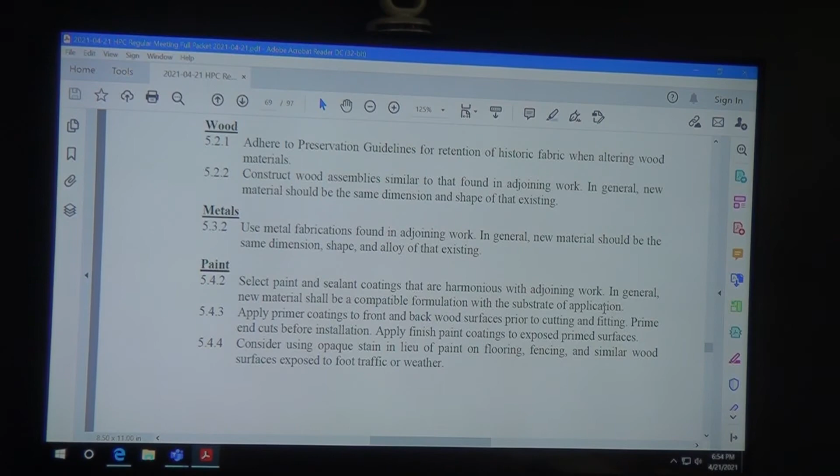Landscaping, 2.4.7. Design principles, 3.1.1, 3.1.2, 3.1.4, and 3.1.5. Modifications, 3.2.1 and 3.2.2. Additions, 3.3.1, 3.3.2, and 3.3.3. Foundations, 4.1.1 through 4.1.4. Walls, trim, and ornamentation, 4.2.1 and 4.2.4. Windows, doors, and openings, 4.3.1 and 4.3.2. Entrances, 4.4.1, 4.4.4, and 4.4.5. Roofs, 4.5.4. Masonry, 5.1.1, 5.1.2, and 5.1.3. Wood, 5.2.1, 5.2.2. Metals, 5.3.2. Paint, 5.4.2 through 5.4.4.

And that's it for the guidelines. Findings of fact: the structure is a contributing resource in the tight weave development pattern. The project is within the tertiary and secondary AVCs. The proposed design, components, and materials meet the requirements of the guidelines. The zoning administrator and chief building official have reviewed this project and commented accordingly. The project is not incongruous with the guidelines.

I'd like to add a condition that a rendering of the proposed shower be given to the HPC administrator for approval. Did you also want to add in there that there'll be no brick fireplace and there'll be another COA? I don't think that has to be in the motion. Could be. We do, because it says brick outdoor kitchen with a fireplace. Okay.

So we need to add condition number 2, yes, that the construction of the fireplace is not included in this motion. Yes.

Okay, is everybody set on the commission about what we've actually done? So, rendering of the shower and no fireplace. Okay, all those in favor, say aye. We need a second. I think you need a second.

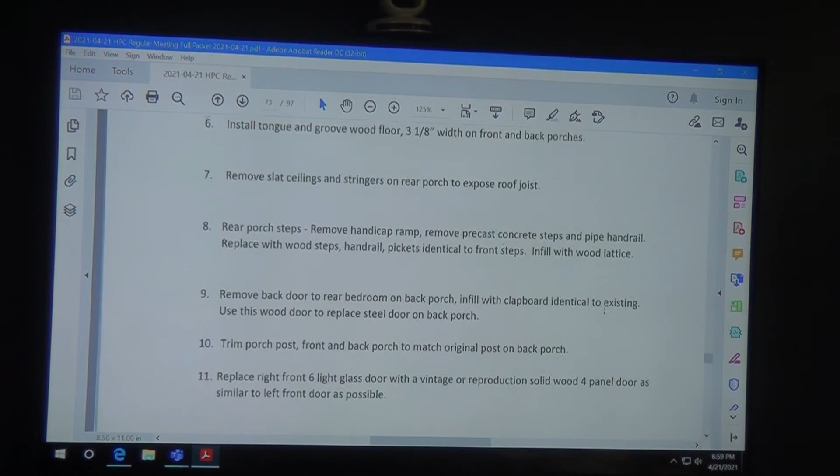308 Metcalf Street, built circa 1880. The applicant is Michael Rogers of Metcalf Holdings LLC. The application includes attachments and is otherwise fully filled out, signed, and dated. This attachment lists several different project items, numbered 1 through 11, which are then illustrated on the following pages.

Number 3 is to remove the wood board infill between the foundation piers and install solid brick masonry infill with decorative vent holes, as illustrated in section 4.1 of the guidelines. Recess the infill 1 to 2 inches between the piers, with solid brick infill done on the left, right, and rear of the house. Install a wood crawl space access door on the rear left side infill.

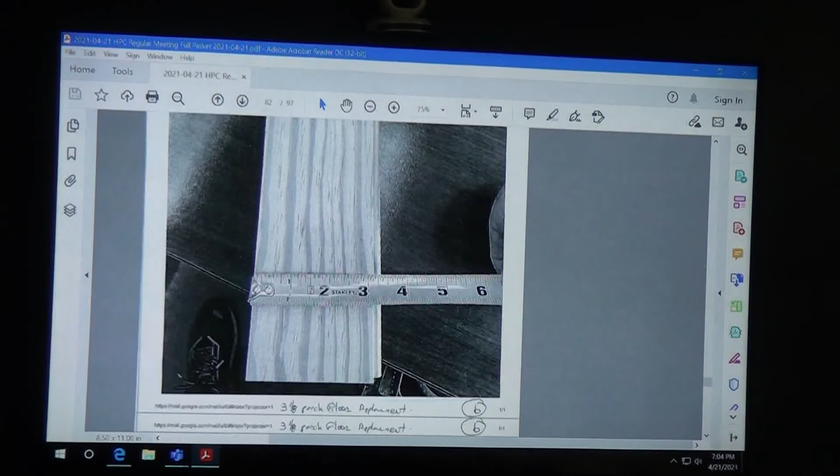Number 6 is to install tongue and groove wood flooring with 3 1/8 inch wide planks on the front and back porches. This is the front porch, showing that the existing wood flooring is not tongue and groove and is a thicker material. The same will happen on the rear porch, which you can see has been pieced together with many different sizes and replacement parts over the years. There's one of the example planks, 3 1/8 inches.

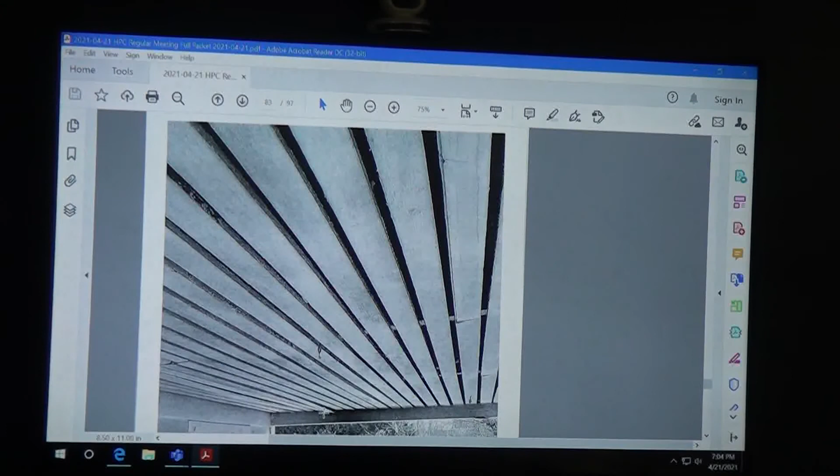That's number 6. Number 7 is regarding the ceiling here on the back porch. Remove the slat ceiling and stringers on the rear porch to just expose the roof joists. So currently it's a relatively low ceiling, and he's looking to remove all of this and leave the roof rafters on the porch exposed. This is on the second floor porch. You can kind of see it in this photograph, all the way up there, at the very top.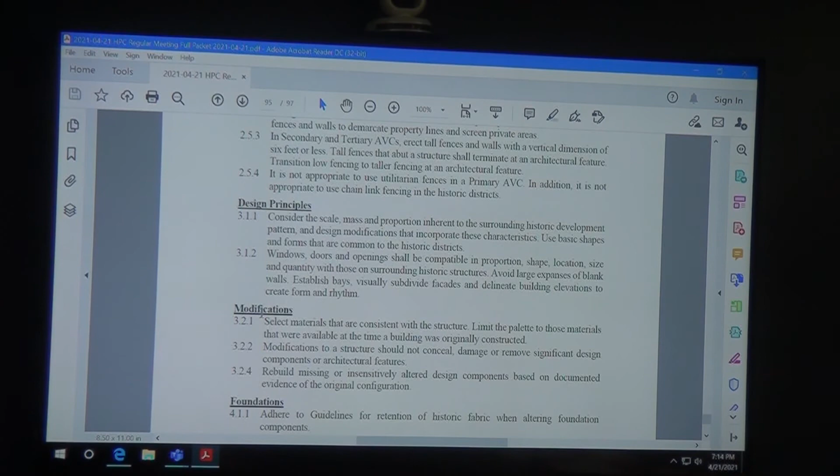Our findings and recommendations continue with staff citing the following historic district guidelines as appropriate to this application: Fences and garden walls 2.5.1, 3, and 4. Design principles 3.1.1, 3.1.2. Modifications 3.2.1, 2, and 4. Foundations 4.1.1, 2, 3, and 4. Walls, trim, and ornamentation 4.2.1 and 4. Windows, doors, and openings 4.3.1, 2, 3, 4, 5, and 6. Entrances 4.4.1, 2, 4, and 5.

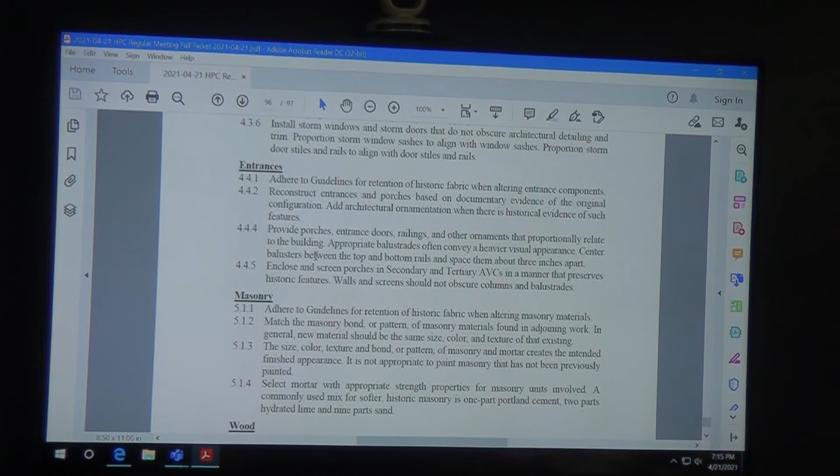Masonry 5.1.1, 2, 3, 4. Wood 5.2.1, 2, or 1 and 2. Metals 5.3.2. Paint 5.4.1, 2, 3, and 4. Contemporary materials 5.5.4.

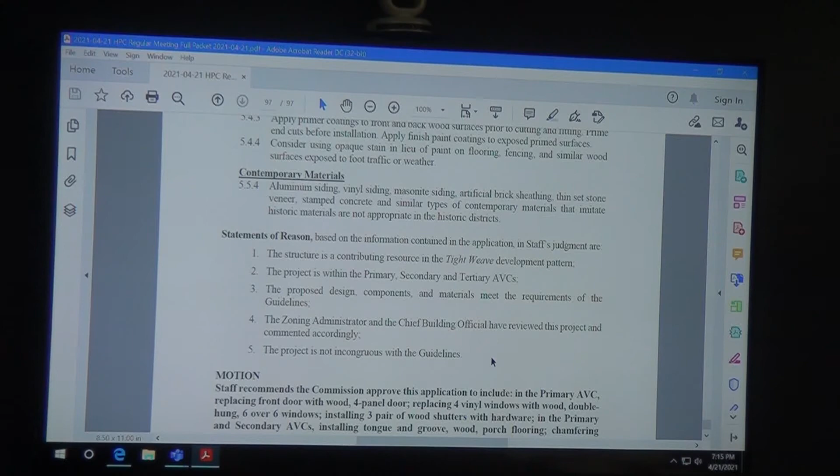Statements of reason based on the information contained in the application and staff's judgment are: 1, the structure is a contributing resource in the tight weave development pattern. The project is within the primary, secondary, and tertiary AVCs. The proposed design components and materials meet the requirements of the guidelines. 4, the zoning administrator and the chief building official have reviewed this project and commented accordingly. And 5, the project is not incongruous with the guidelines.

So staff recommends the commission approve this application to include, in the primary AVC, replacing the front door with wood 4-panel door, replacing 4 vinyl windows with wood double hung 6/6 windows, installing 3 pair of wood shutters with hardware, and in the primary and secondary AVCs, installing tongue and groove wood porch flooring, chamfering existing wood posts, replacing wood foundation infill with solid or lattice pattern brick and wood access door.

In the secondary AVC, removing slat porch ceiling, removing metal door, relocating wood door and infilling door opening with wood siding. And then in the tertiary AVC, replacing precast concrete steps, metal handrail and handicap ramp with wood steps and handrail, removing chain link fence and picket fence, installing wood 6-foot fence, removing AC unit and infilling with wood siding.

Okay, thank you Matt. You need a breather. I do. Michael, as applicant, do you have any further comments? I think Matt's done a great job. I think he has too. In fact, I commend you, that's a pretty good application for an accountant. Oh, thank you. Just goes to show you, you don't have to have a whole lot of help to put together an easy to understand application.

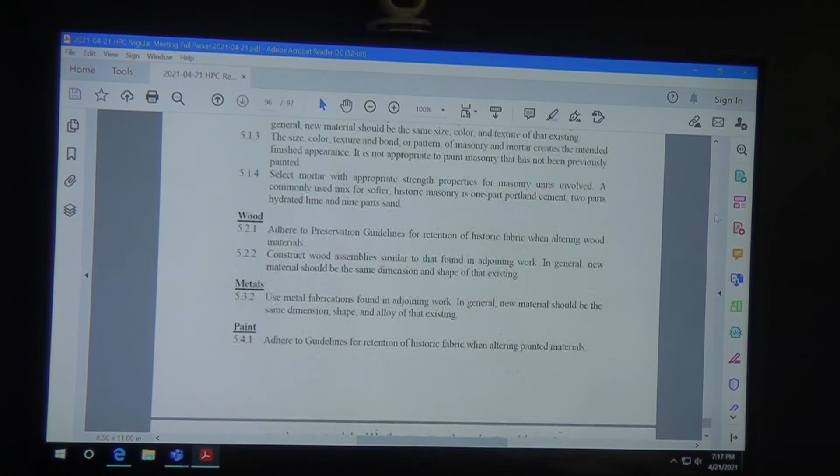Okay, so with that said, commissioners, what kind of questions do we have? I just have one question. It's about the fence on your next door neighbor's side. You want to get rid of the picket fence and the chain fence. Is that the only part you're going to be removing and replacing with a 6-foot fence? Do we need to look at a picture to help us?

I'm just asking about one part, right? As you're looking at the back of the lot from the front, on the left side, there's a wood, like a Lowe's type pressure-treated fence that's up there. If it's mine, I'll take that down and put my fence up. If it's not mine, I'll put mine against it.

Okay, so you'll take the wood fence across the back. Yeah, that's what I was thinking of. Then the chain link fence goes all the way across the back of the property and up the right side.

So you're going to leave the back part of the backyard where the fence backs up to the Historical Society's garden? You're going to leave that alone? I was going to put the fence across there. You're going to put the 6-foot fence across there too? Just to enclose the whole backyard for privacy.

Okay, but you're going to leave the fence that belongs to the neighbor on the left alone, I'll just take mine right up to that. I understand that, that doesn't bother me. What I'm asking about is the fence you can see from the garden behind you, that divides between you and...

That's the picket fence? Yeah, that divides you and the Historical Society's garden, which is owned by the Historical Society. Okay, that's all I need to know. I'll put my fence on my property line in front of it. Gotcha. I'll just take down the chain link that's on my property.

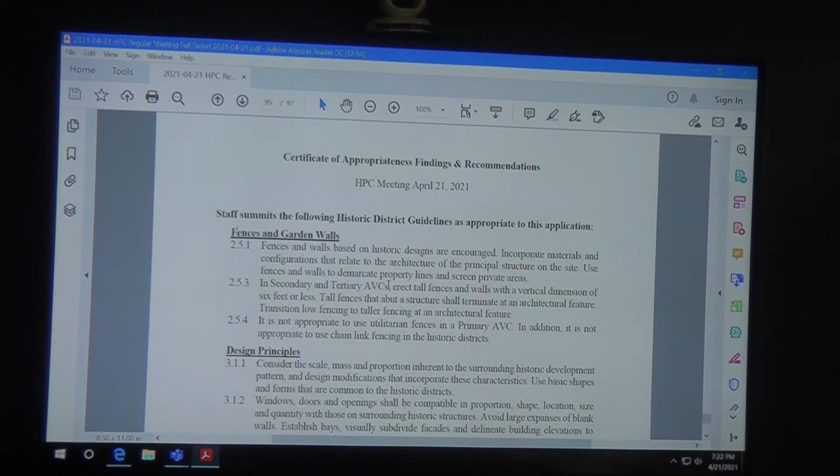The applicable guidelines are fences and garden walls 2.5.1, 2.5.3, 2.5.4. Design principles 3.1.1, 3.1.2. Modifications 3.2.1, 3.2.2, 3.2.4. Foundations 4.1.1 through 4.1.4.

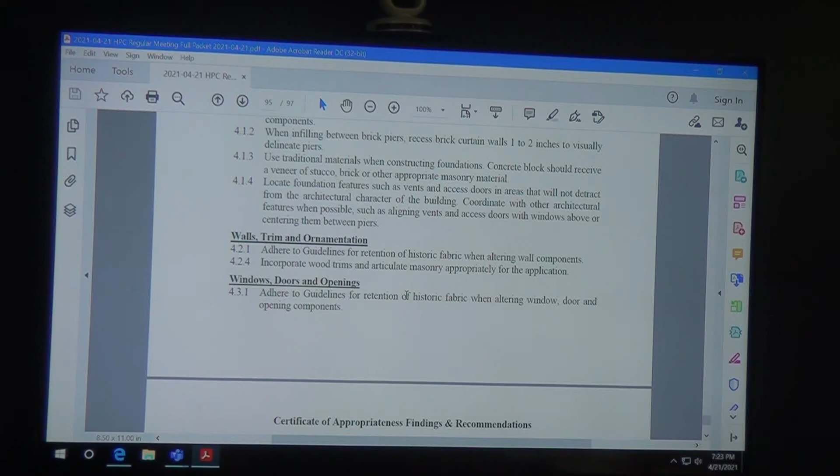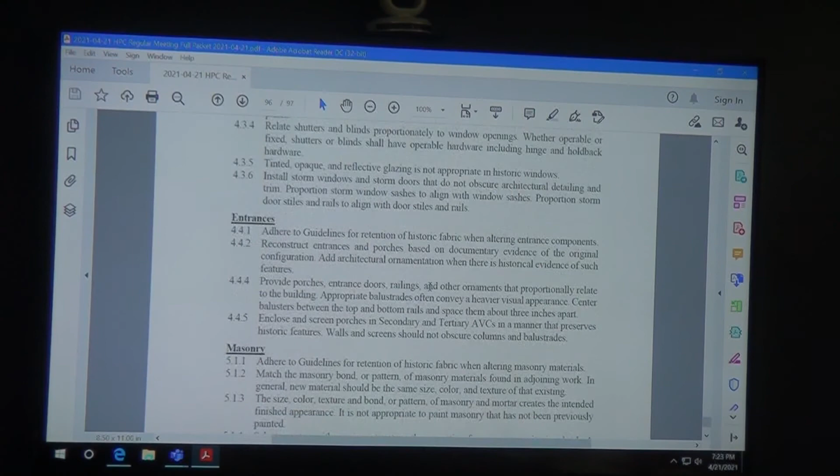Walls, trims, and ornamentation 4.2.1, 4.2.4. Windows, doors, openings 4.3.1 through 4.3.6. Entrances 4.4.1, 4.4.2, 4.4.4, 4.4.5.

Masonry 5.1.1 through 5.1.4. Wood 5.2.1, 5.2.2. Metals 5.3.2. Paint 5.4.1 through 5.4.4. Contemporary materials 5.5.4.

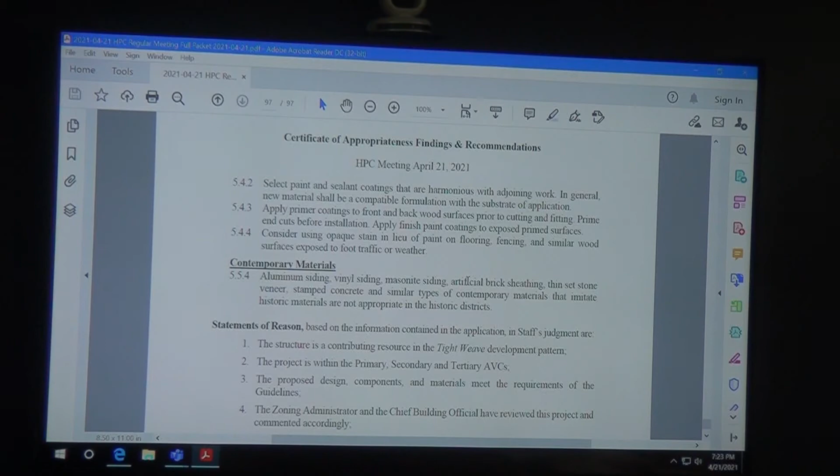And the finding of fact is the structure is a contributing resource to the tight weave development pattern. The project is within the primary, secondary, and tertiary AVC. The proposed design components and materials meet the requirements of the guidelines. The zoning administrator and chief building official has reviewed this project and commented accordingly.

And this project is not incongruous with the guidelines. Well done, thanks. Okay, so we've got a motion. Do we have a second? Got a second. Any discussion? All right, hearing none. All those in favor, please say aye. Aye. Any opposed?

Okay, that being the case, can we have a motion to issue a certificate of appropriateness? So moved. Got a motion? Need a second? Second. Kristen and George. Any discussion?

Fair enough, I would just like to commend Mr. Rogers on what you're doing. Me too, I do too. Fantastic job you got planned. Thanks, I'm looking forward to it. It'll look good when we get done. Oh, I'm sure.

We need to vote first, so we got a motion and a second. All those in favor, please say aye. Aye. Any opposed? All right, Michael, you've got a... Thank you very much, guys, we appreciate it.

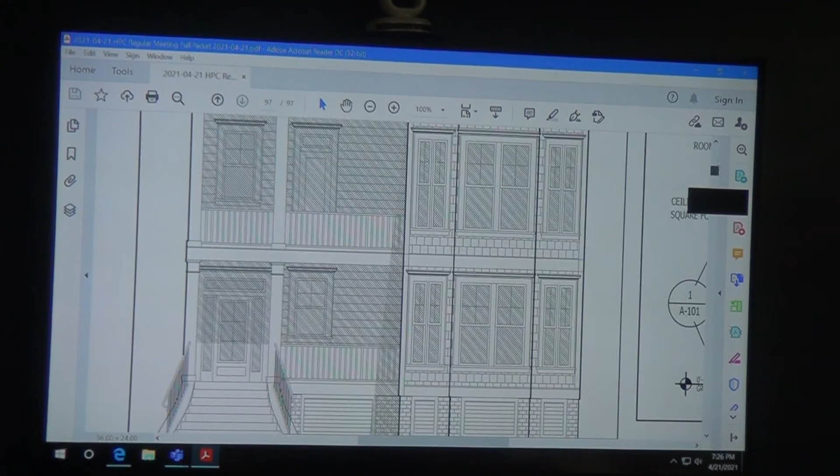Joe's got a question about DBN site, where we are with that. Okay. I still need to contact the owners to call them to the next design review meeting, May the 7th. That would be the next one, if that happens, but again, depends on their availability as well. And if they choose not to be available?

I don't know what we do then. And we've been waiting three years, so we need to do something. Come rejoin us, Madam Chair.

The thing we probably ought to do is go ahead and summons them to come see us, and I guess we could then be prepared to take the next step if things don't go the way we'd like it to. That's right. So I'll probably have to consult with the city attorney, but we'll look forward to seeing those folks hopefully at our next design review meeting. And Matt, we can get another report from you. Yep, at that time, should they not appear.

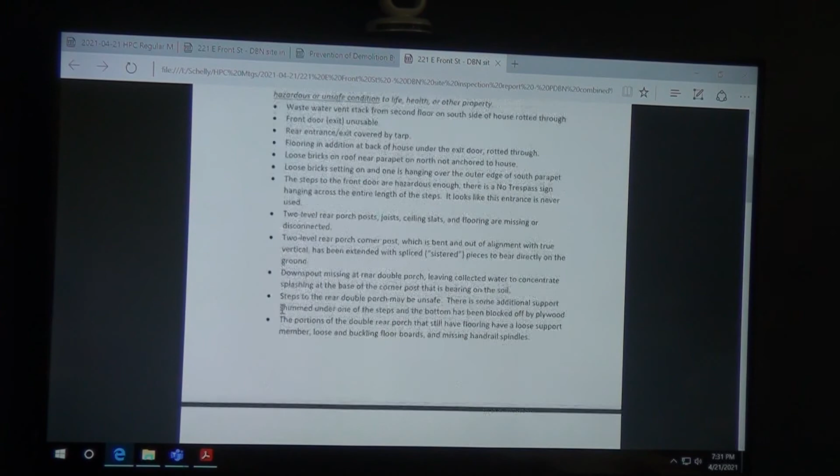The 2-level rear porch posts, joists, ceiling slats, and flooring are missing or disconnected. The rear porch corner post, which is bent and out of alignment with true vertical, has been extended with spliced or sistered pieces to bear directly on the ground. There's a downspout missing at the rear double porch, leaving collected water to concentrate and splash at the base of the corner post that is bearing on the soil. Steps to the rear double porch may be unsafe; there is additional support shimmed under one of the steps, and the bottom has been blocked off by plywood. The portions of the double rear porch that still have flooring have a loose support member, loose and buckling floorboards, and missing handrail spindles. Lastly, the brick pier at the northwest corner of the single porch is tilting away from the building.

So that gives an idea of the dangerous stuff. Number 2... you had to be there, Trey. I do have photographs that we can peruse later if you want, and it may be illustrative anyway.

The next category is regarding deterioration of exterior walls, foundations, and other vertical supports that might cause leaning, sagging, or buckling. We have many locations where there's significant loss of mortar in the joints. Two of the piers that had supported the front porch are either collapsed or listing. There's actually one that was basically just a pile of bricks, obviously the pier, and some are just leaning and listing.

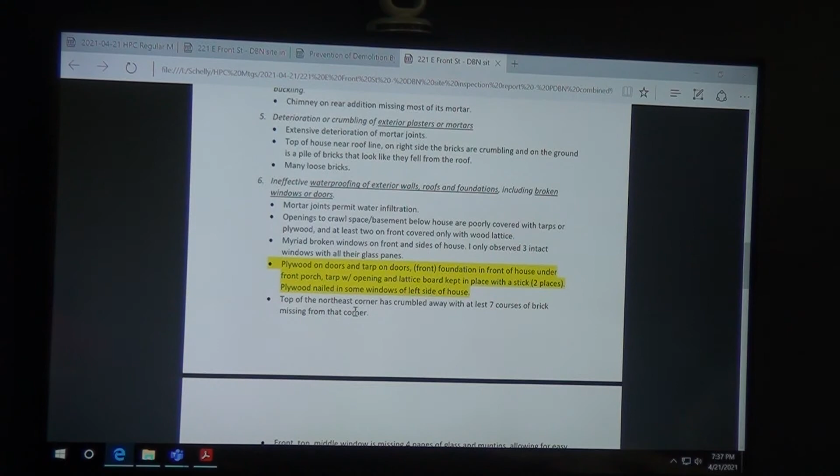This is still continuing with exterior walls. The front top middle window is missing 4 panes of glass and muntins, allowing for easy entry of water, insects, and flying animals.

Several basement windows are missing and covered only with tarps, which are deteriorating, leaving easy entry of water, insects, and animals. Brick is missing under the sill of the front top middle window.

Seals around pipes extending through the brick walls are missing. The single rear porch is entirely encased in tarps, leading to suspicion that the porch is otherwise not weather-tight.

Rear porch water table trim boards are too short and falling off, leaving a hole at the northwest corner, leaving easy entry of water, insects, and animals.

7 is defective protection or lack of weather protection for exterior wall coverings. So this might not necessarily be the siding, but the paint on the siding, let's say. It may be membranes and such.

Including lack of paint or weathering due to lack of paint or other protective coverings. So all windows are lacking adequate paint.

On the rear of the house, near the back steps on the left side, siding has pulled away, leaving rotten wood beneath exposed. So there's siding which is protecting the wood - I don't know if that's the right category, but anyway, that's what's happening.

At the back steps, the door going into the house has a tarp covering. The tarp is in tatters. If there is a door there, it's not visible.

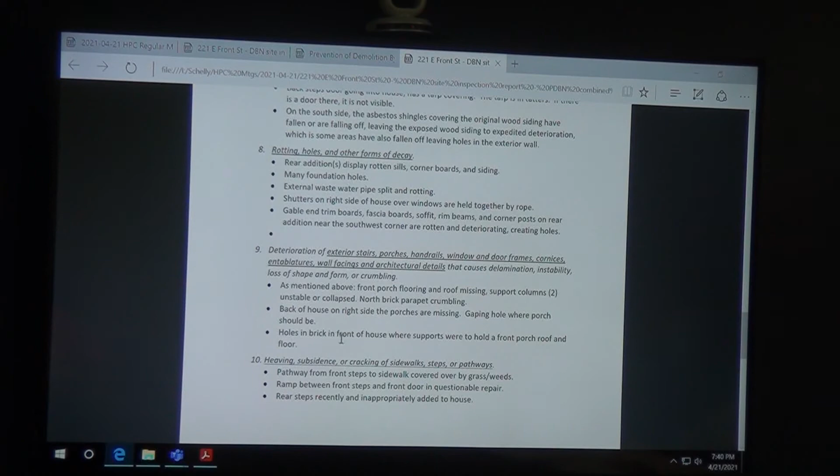The back of the house on the right side, the porches are missing. There's a gaping hole where the porch should be, and holes in the brick in front of the house where supports were to hold a front porch roof and floor.

10. Heaving, subsidence, or cracking of sidewalks, steps, or pathways. The pathway from the steps to the sidewalk is covered over by grass or weeds. I was even wondering if there was even a sidewalk there.

So it could be just missing. The ramp between the front steps and the front door are in questionable repair. Rear steps recently and inappropriately added to the house.

Additional items, above and beyond, right? The tree at the northeast corner is damaging the face of the house and possibly the foundation, needs an arborist review. Tree at the northern access opening is possibly damaging the foundation, again needs arborist review.

That could actually be added to the dangerous list. So, that's quite a comprehensive list, and just to remind the board, obviously the Carlson House has been on our demolition by neglect list for some time.

I want to say it's been probably 15 years since I was inside, and it was just as much a problem then as it is now. As you know from previous reporting to the board, there has been a change of ownership.